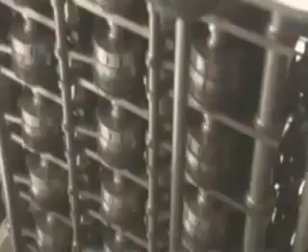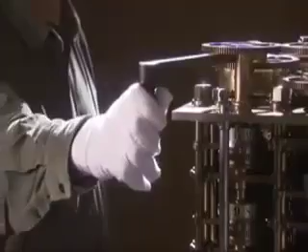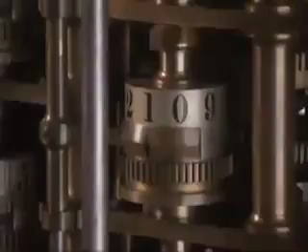In 1832, the drawing room of his London home became a showcase for demonstrations of a small section of his difference engine, a far from finished device by which he intended to revolutionize calculation by mechanizing it. At his soirees, London's intellectual society watched what you see now. As Babbage cranked its handle, this machine produced a series of polynomial calculations that were repeatable and error-free. Most astonishing, it was automatic.

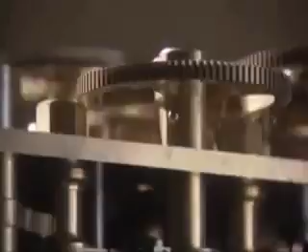Any of his illustrious guests might have operated the handle as well as Charles Babbage, perhaps the geologist Charles Lyell, or Charles Darwin, or Charles Dickens. Once set, the machine seemed able to proceed, to think on its own. But what was called the beautiful fragment of the machine Babbage had intended to build was all he ever finished of it.

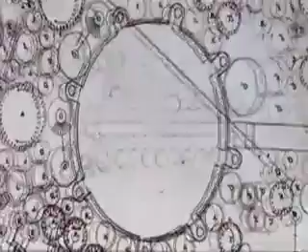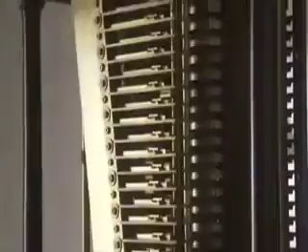In fact, his imagination had already moved on to an even more ambitious mechanism, one that would make obsolete the abandoned machine. The analytical engine would be a general-purpose calculating automaton. For most of 30 years, he would revise and improve his notional design. Only a few partial sections of it were built, this one after Babbage's death by his son.

The analytical engine was an ever-evolving machine. Each breakthrough elegantly drawn up, annotated to describe mechanical motions with a coding system that Babbage claimed was his finest invention. The analytical engine may be the most intricate operating mechanism ever fully realized with paper and imagination alone.

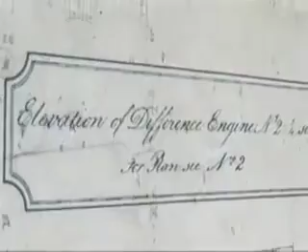In 1846, Babbage abruptly changed course. As if determined to make good on an old obligation, he worked for 2 years to complete a full set of drawings for difference engine number 2. It would require 8,000 parts, only a third as many as the first. He offered it to the government, but did not protest when it declined to build it, and the drawings were carefully put away. Eventually, they came from the Babbage estate to rest in the library of the Science Museum in London.

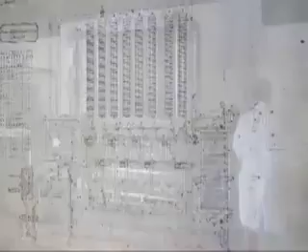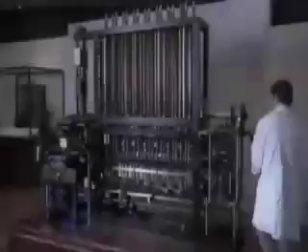More than 130 years later, in 1985, the museum's new curator of computing, Doron Swade, became convinced the institution could build difference engine number 2. After all, with the intact drawings, it seemed feasible and within financial reach. It took 17 years and drama to rival Babbage's so long ago. And it works, just as Babbage designed it.

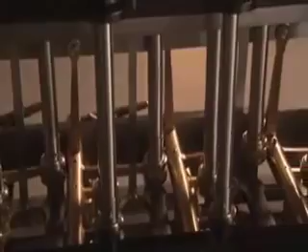Every turn of the engine's driving handle is carried through gears, cams, rods, levers, and springs to release and arrest precisely aligned number wheels. A helical arrangement of steel fingers continually polls the register towers to find and perform the carrying of tens. In its continuing sweep upward, it is mesmerizing.

The intricate printing section can be programmed for 1, 2, or 3 column output, for 2 font sizes at once, for variable margins and column gaps, even word wrap where necessary. It prints hard copy on paper and simultaneously impresses the same output into a tray of plaster to produce a stereotype, a mold for casting a full-page printing plate. When a tray is full, the printer pauses the entire machine.

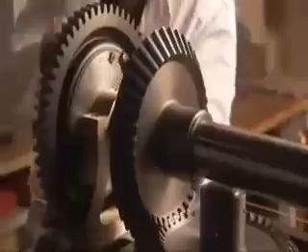In the spring of 2008, a clone of DE2 commissioned by Nathan Myhrvold was completed at the Science Museum and shipped to California. At the Computer History Museum, it would charm new thousands of discerning eyes.

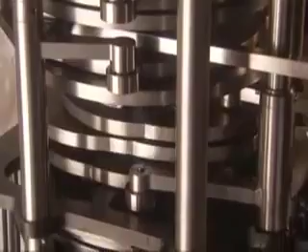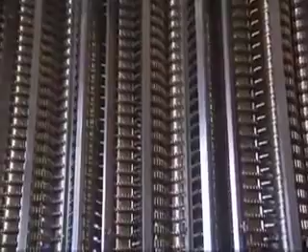Today, the crotchety proud genius, who never managed to prove it during his lifetime, has a fair claim to honor as a pioneer in the history of intelligent machines, just as his parlor guests in 1832 suggested. His difference engine continues to inspire the admiration of his intellectual heirs, a celebrated and unique icon to chroniclers of computing. Charles Babbage, remember, never saw it, except in his stubborn, prescient dreams.